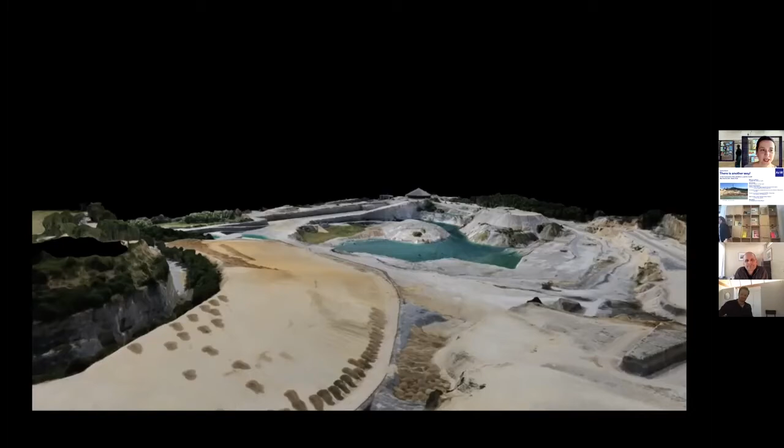As the next speaker, I'd like to introduce Kyosuk Lee, Senior Associate of MVRDV Rotterdam, who will talk about Seoullo 7017 Skygarden in Seoul.

I think you are in Korea right now. Is that correct? What time is it in Korea? It's 2 a.m. I'm so sorry and so grateful that you're still here. Thank you so much. But let me introduce you.

Kyosuk Lee is an urbanist and an architect, and he leads projects for MVRDV's Asia studio. Since joining the firm in 2009, he has realized a variety of projects, among these the Skygarden in Seoul and the Tianjin Binhai Public Library in China. He's currently overseeing the construction completion of Paradise City Entertainment Development and the Tancheon Waterfront Development in Seoul and a folly structure in Gwangju in South Korea. Before he joined MVRDV, Lee graduated as an architect from the Berlage Institute in Rotterdam in 2008 and worked as a researcher with Urban Think Tank in Venezuela.

In the exhibition Land for Us All, we're showing this project, the Seoullo 7017 Skygarden, alongside the uncovering of the Cheonggyecheon stream as two examples in one city that radically deals with traffic infrastructures of the 70s. I think that almost seems impossible for us here in Vienna, where streets and parking spaces seem to be more sacrosanct than churches have ever been.

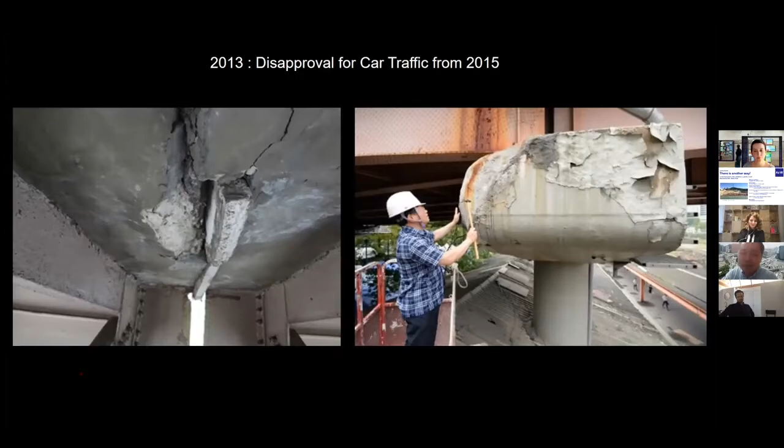People usually said yes, we need to demolish it and build a new car bridge. But at the same time, there was growing voice in Korea that maybe no more car bridge is needed — we might use this chance to create a new idea, a pedestrian bridge. All the statistics show that Korea is too car-dependent. The Korean death rate from car accidents is dramatically high, and because of this, the 10 million population car-addicted city has had a lot of pollution issues growing in the last decade.

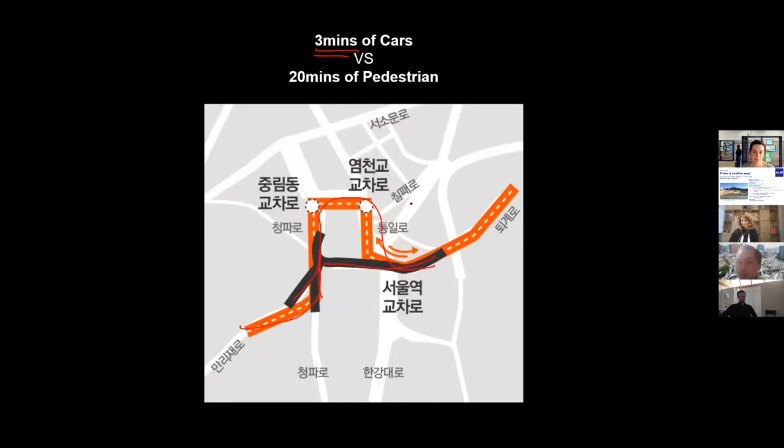So the mayor decided, okay, let's use this bridge for pedestrian connection and detour the cars — that's the orange route you see. There was quite a political discussion: what is more important for the city? If cars take the orange detour route, they might spend 3 minutes more. But if we change the bridge for pedestrians, pedestrians might save 20 minutes going from one side to the other. The mayor made the decision to go with the pedestrian connection.

So in 2015 there was an international competition. This is the situation of the bridge — you see the east and west are completely divided by the train station and huge infrastructure. It's one of the most important traffic roads in Seoul.

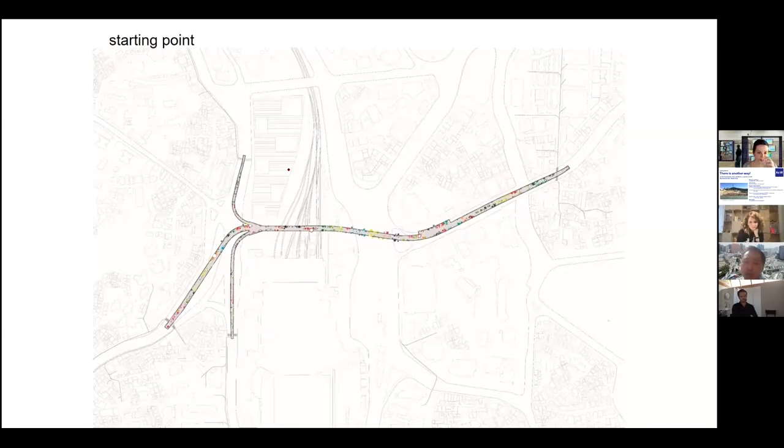MVRDV was not only focusing on the landscape design of the park, but we saw the thing in a different way. We thought about what if the bridge is just the starting point of a three-dimensional network of pedestrian routes across the site.

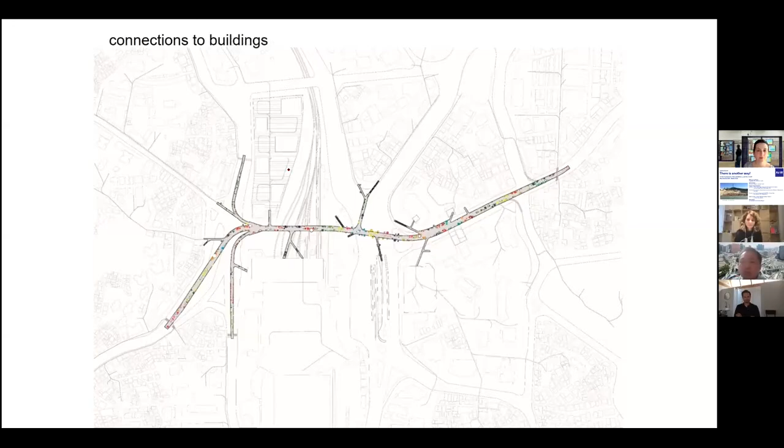So we started to add branches expanding through the neighborhood. We expect that ultimately this bridge becomes like a tree that creates green space and a pedestrian network around the area. That was the winning entry.

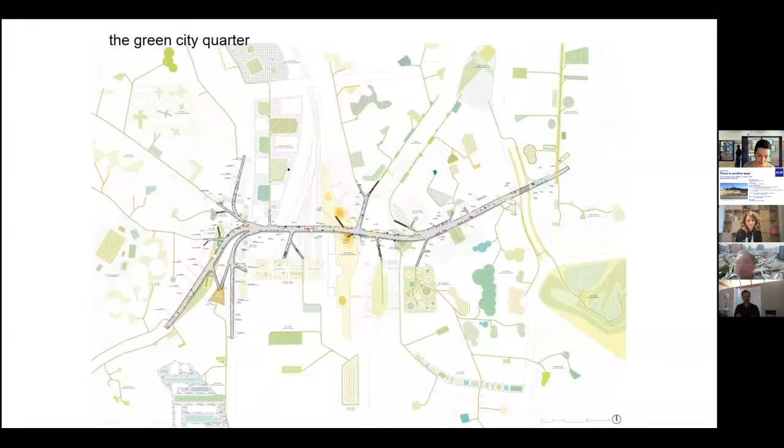After winning the competition, we encountered quite a structural constraint because this bridge was not stable enough. The only possible way to grow plants was either to apply just 10 centimeters of soil with 100% coverage — in this case you basically make a golf course without any trees.

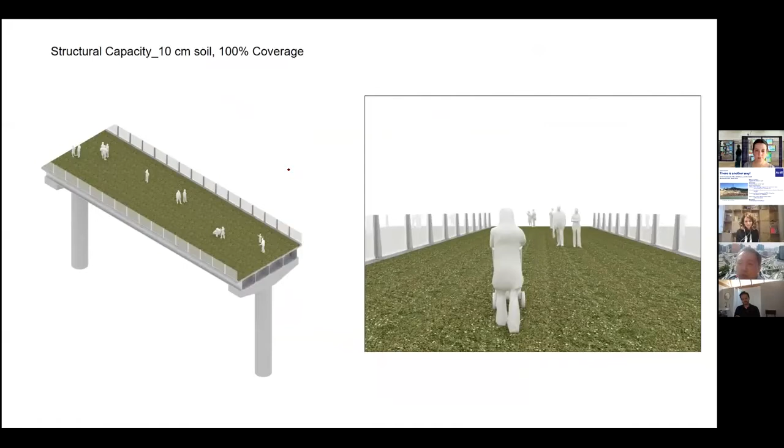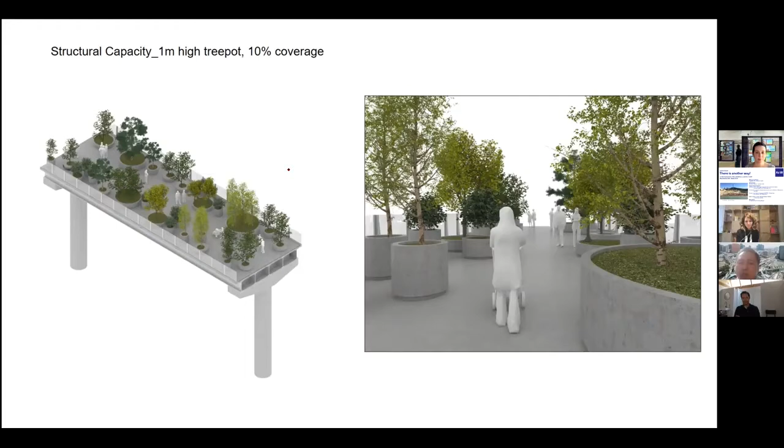So the question was how to use this amount of soil for the new park on top of the bridge. What we did was squeeze this amount of soil into 10% coverage, and then use that as tree pots. This way we could have more diverse plants in the project.

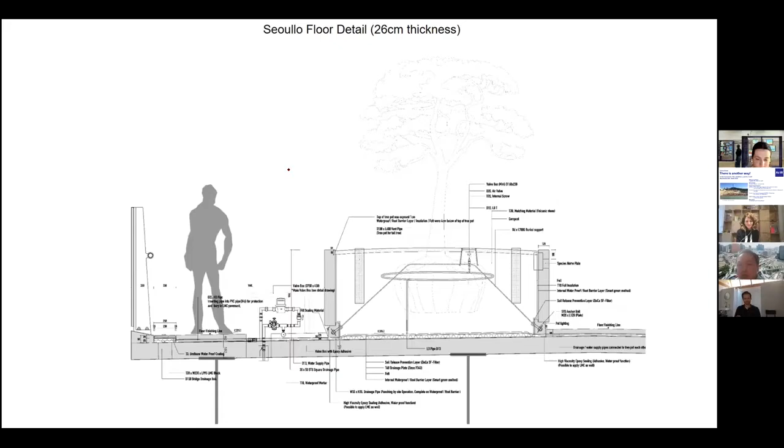It was a very challenging detail to make everything very light — the structure is only 26 centimeters, which includes all the electronic connections, drainage, and automatic water supply. That's how it was made. The trees were also tied down more strongly than usual, because they could fall onto the traffic below.

This project also has a hidden ambition: it serves as an experimental field to see how many kinds of plants could survive in this harsh environment. So we could not choose just one or two plants for this garden — we thought, let's try to have as many as possible.

So what we did was bring about 230 species that could survive in Korean climate, in Seoul's climate, and organize them according to the Korean alphabet order. This means if you enter from the east side to the west side, you basically walk through a plant library of Seoul.

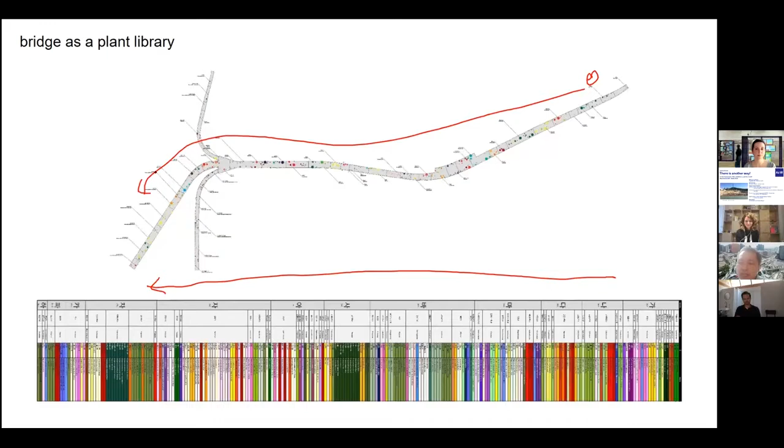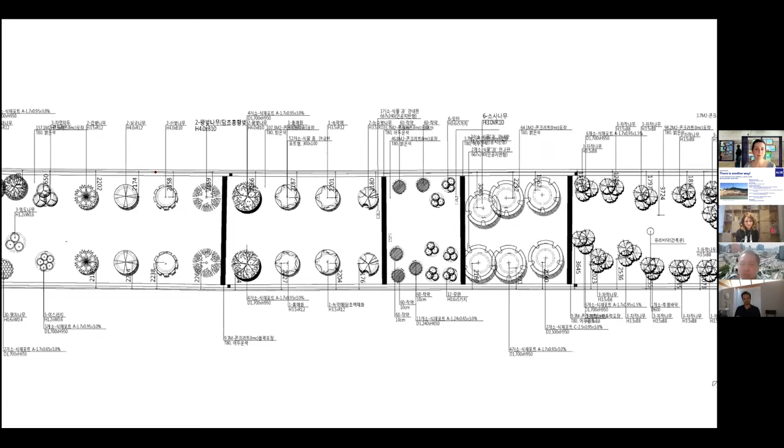This is a zoomed-in view of the drawing — organized according to the alphabetical order, then grouped by the family of species. This is how we contain the plants in the tree pots, with the name indicated. Of course, it has a very important educational purpose.

As you can see, each area has a certain environment — this is kind of the bamboo zone, one of the popular zones. Some plants need different treatment, like the water lily. Pine tree is also a favorite in Seoul, and even an almost forest-like configuration could be made with this method.

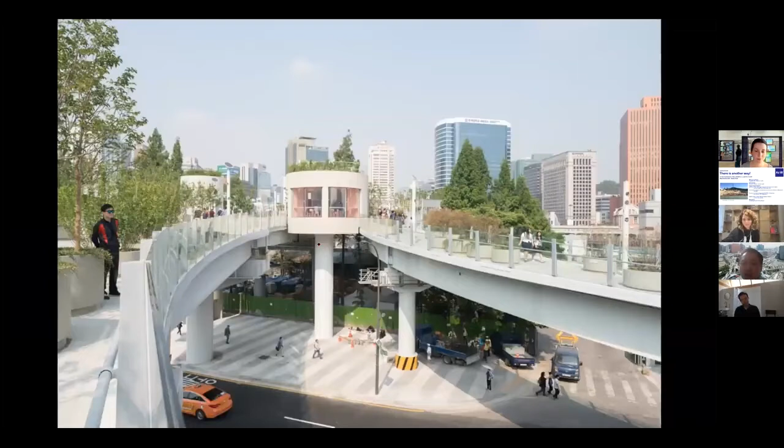We don't only want to make this bridge as a park, we also want to make this as a street. So we try to add many different activities. Using the shape of the tree pot, we add cafes to put on the bridge. We add extra structure and make the stair to the roof, and from the roof you see the overview of the bridge and the city. Some of the tree pot opens as a theater to provide performance on the weekend. Some plant is more for cooling down in the summer. Some of the tree pot is made for the children to shout and enjoy in the air. And also we preserve some part of the old structure, to look down to the street.

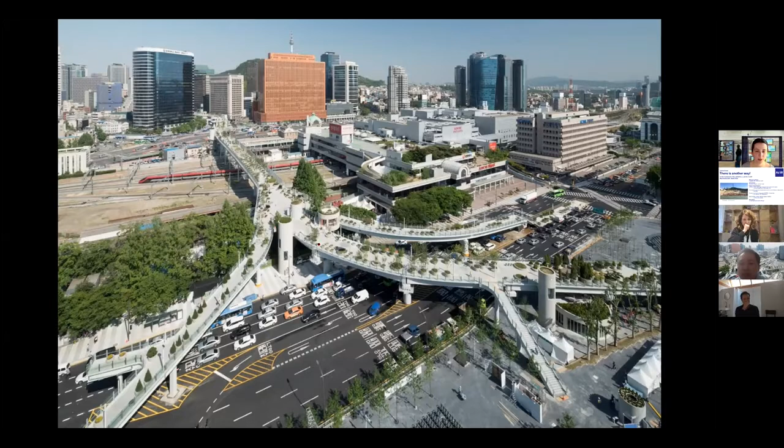Connection is a very important part of the project. You see the tree-like shape extended, also connected to the ground level by escalator and lift, another lift. We also extend the bridge to the ground level, so the bridge gets even longer in the connection. We add extra branches to the neighbors who don't have a connection to the center, carefully locating the stair to match with the street nearby. We also try to connect some of the towers nearby. This is a view from the commercial space of the podium part of the tower connecting to the bridge project.

In terms of the lighting, Seoul is full of this kind of rainbow color, and we don't want to repeat the same way. We want to make very calm lighting. The blue was a very good background for the activity happening on top of the bridge, making quite a calm contrast with the surrounding.

In 2017, when this project was finished, people were concerned a lot. They said 70% of the trees would die in 2 years because it's harsh, you don't have enough soil. That's why we have a photograph project to prove that they could surely survive. This is a photograph taken from the same viewpoint 2 years later, and most of the trees, 98%, survived in very good shape.

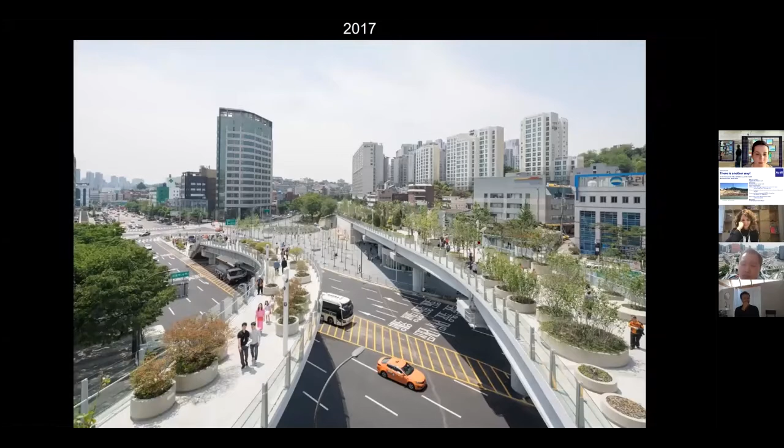This is one of the views from the opening day, and this is the way it survived 2 years later. It's not only the trees that grow, but also the small businesses around the bridge are also growing. This is also a very important aspect of the project.

We are now doing the Seoullo 2.0. Basically the Seoullo project was a completely top-down project because it's owned and 100% funded by the government. But from 2.0 we try to do different things. We make the extension of the pedestrian network to the surrounding, and we appoint the street architect, local young architects, to take care of each of the connections. We appoint 10 young architects, and they discuss with the local residents how to develop this network further.

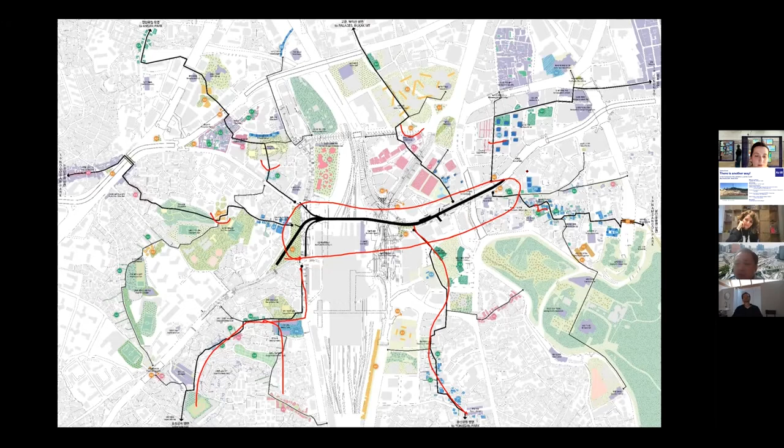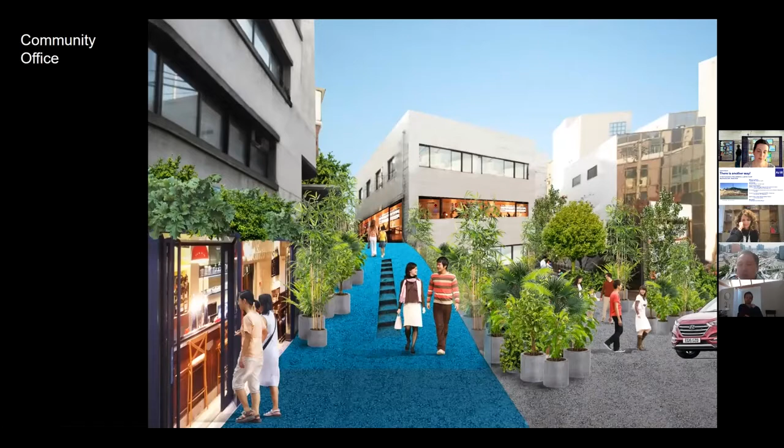For instance, we make some collage to explain how to develop this network. This is a community office, almost abandoned feeling, where when the network continues, green and pedestrian flow could continue. And of course some of the private businesses could also contribute in a kinder way to visitors. Then many gated housing complexes could also try their effort to join this connection.

In the city center there are still some urban factories that bring quite some character to this area. So we suggest it's not only the production area, but to also show the products they made on the street to the visitors. This is also one of the projects - the highway toll gate could be changed to a pedestrian connection from one side to the other.

So this is our expectation. In 2015 it was the car bridge, and step by step it provoked the urban regeneration of the surrounding area, making it more green and dense and more pedestrian oriented with vibrant urban activity.

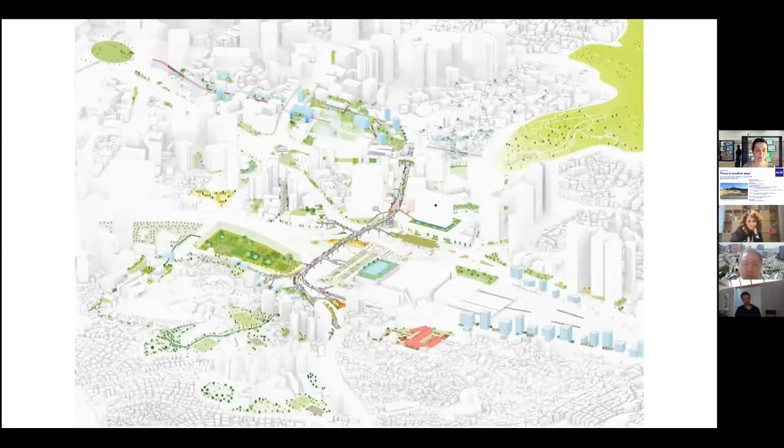I have a short movie to show, since because of the pandemic situation not everyone of you could visit the project. Let me try.

This is the movie from the sky. You see we are entering from the Korean alphabet order, the Ga zone, and this is already an extended part of the bridge. You are marching toward the city center. You see the central station building there, and then the connection to the office building and hotel buildings surrounding it. This is like a 50-meter wide huge street that has 12 zebra crossings. You go over, and then there's a major traffic lane, the train lane, and you go over, and there's some plaza before they get bifurcated into 4 different neighborhoods.

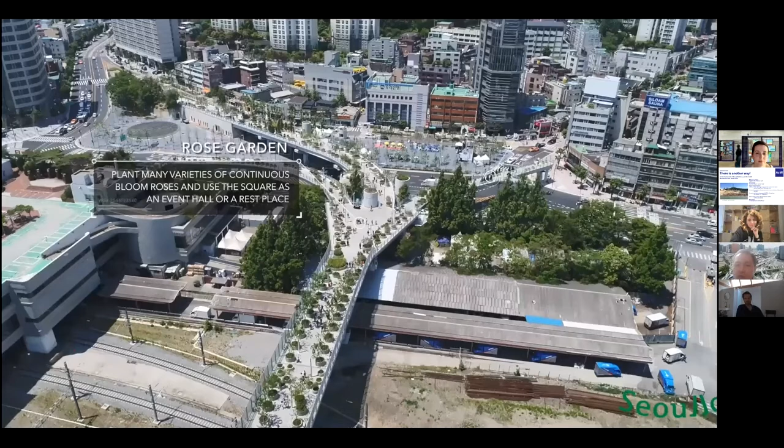And then we also transform one of the plazas at the ground level into a pedestrian friendly plaza, with potential pedestrian activity happening. This was what I prepared as a short introduction for the Seoullo project.

Thank you. Thank you very much. That was very interesting, and I really hope that one day I will be able to visit this project. One day it will be possible again.